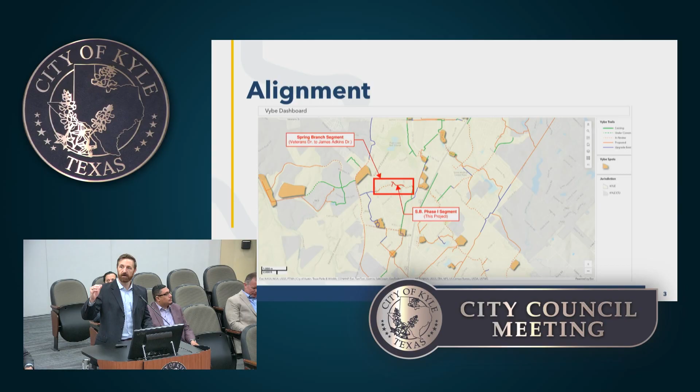So we're super honored to be part of this. Just to give you an overview, what's on the screen is a map of the overall Vybe Trail system from the Vybe dashboard on the city's website. The portion we're talking about is Phase 1 of the Spring Branch segment, which runs between James Adkins and Veterans Drive, between Western Cove and Spring Branch Drive.

It connects the Plum Creek neighborhood and the Silverado neighborhood, and then also Spring Branch Drive.

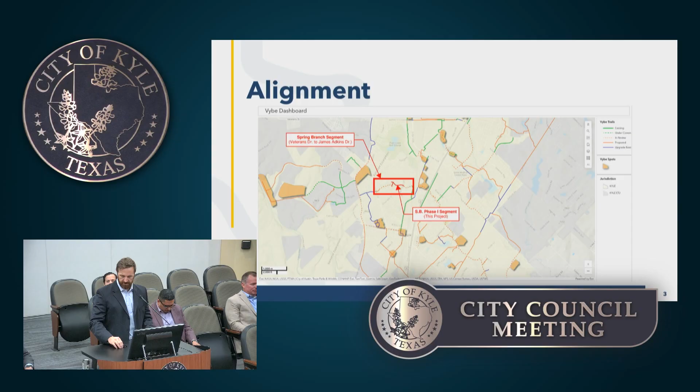Schaumburg and Polk did a preliminary engineering study of the alignment for the entire Spring Branch segment, which runs all the way from Veterans to James Adkins. You can see on this map a property ownership exhibit showing which portions of property the city owned or where easements might have been needed back when this was studied. Outlined in red is the Phase 1 segment we're talking about tonight.

And for a little bit of history, that orange triangle on the left side of the Phase 1 segment was previously owned by the Silverado HOA, I believe, and the city purchased that last spring. With that purchase, the full design and construction of the Spring Branch Phase 1 segment is able to continue.

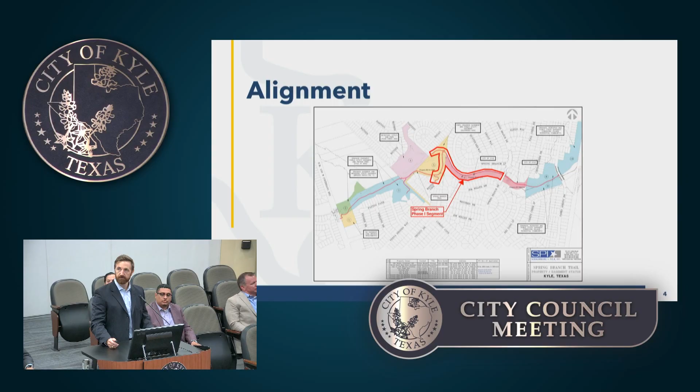As part of that, the city had discussions with the city's floodplain administrator about the need for a floodplain development permit or floodplain analysis. What's on the screen right now is the Spring Branch Phase 1 segment superimposed on top of what is currently the city's floodplain mapping for this area.

That's a study done in 2014 through the U.S. Army Corps of Engineers, USACE. As you can see, part of the trail goes through the floodplain, goes across it, and some of it travels within and adjacent to the floodplain.

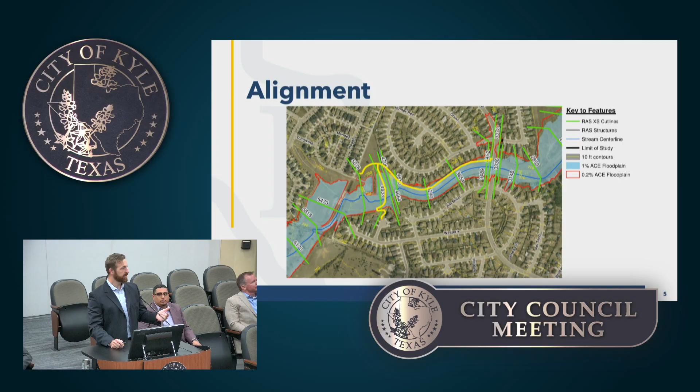The feedback we got from the city's floodplain administrator was that a floodplain development permit would be required for this trail to go all the way to construction. So that's what we're here talking about tonight, progress on the flood study necessary to complete the floodplain development application.

Schaumburg and Polk has completed the initial flood study of this area of Spring Branch. Part of that includes updating the hydrology to Atlas 14 standards, which are relatively recent. Those were not the standards used back in 2014 when the last floodplain model was developed. So part of our charge in studying the floodplain is to update to current standards, Atlas 14, and then analyze the impacts of the trail.

So we've done that floodplain modeling, and that modeling is complete. What's presented on the slide here is what we were planning to submit to you guys this past Monday. In analyzing the impacts of the trail to that floodplain, although they are super minimal, we still believe we need to make some minor adjustments to those construction plans to improve the condition after the trail is installed.

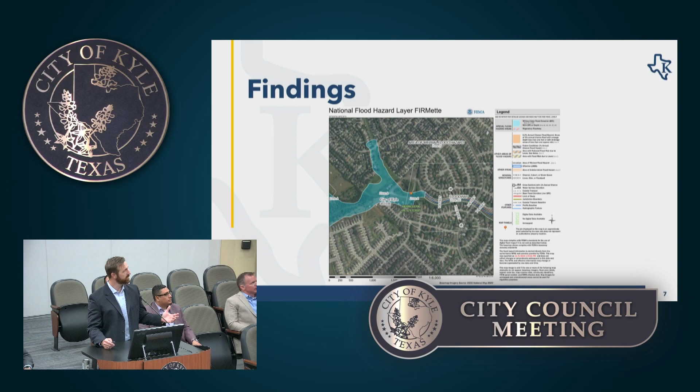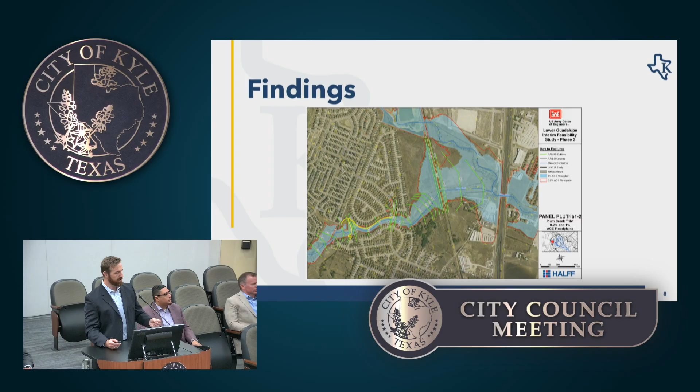These are the preliminary results from our floodplain model that we've done. If I flip back and forth, not to make you sick, you can see there's a bit of detail that exists in this FEMA map. These FEMA maps are generally based on historical records and reports, not on specific models. Some of that detail was lost in the 2014 study, and with the updates to the Atlas 14 data, some of those historical reports are again reflected back in this floodplain model.

So this is a floodplain model up to current standards, and you probably can't even see any difference on this map. There's a yellow outline, which is the existing floodplain, and an orange outline, which is the floodplain with the proposed trail improvements. They're almost right on top of each other. We're showing a decrease in floodplain elevation in some areas, and in general no increase in the floodplain. There are some minor areas we'd like to make better before we send this to construction.

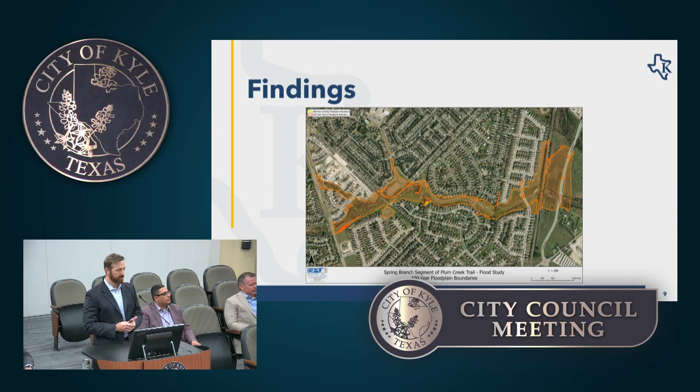So like I mentioned, we've done the initial flood study with almost no increase in the floodplain, and we're currently in the process of making some modifications to the plans so that we can really minimize any impact to the floodplain that the proposed trail would have. Then we're planning to submit that to the city with updated construction plans.

We should be able to follow this schedule. We're slightly delayed from what we had in the slide earlier, but I think this is still a good schedule. We should be submitting sometime this month for a floodplain development permit application, along with updated 90% construction drawings, which account for the revised limits of the project to just the Phase 1 scope.

Hopefully sometime next month we anticipate getting floodplain development comments and city comments on the construction drawings. We would then resubmit plans in January of '26 and hopefully have very minimal comments issued, if any, from the floodplain administrator or from any of the city departments who would review it, and hopefully be able to go out for bid maybe in February of next year.

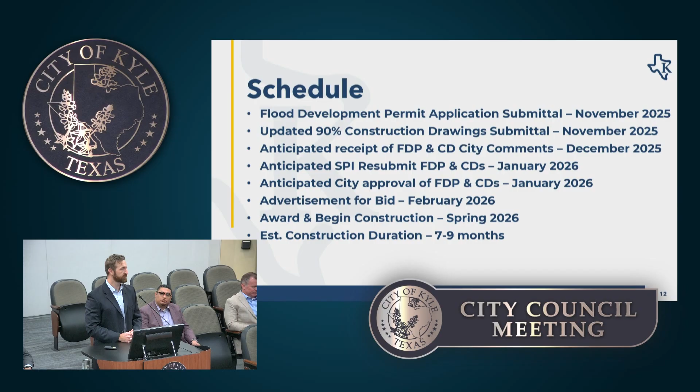Okay, do we have any questions? Dr. Harris?

The houses along Jim Miller that are right up against the berm almost, their lots are consistently flooding every time. This is an ephemeral stream—it doesn't have water in it all the time, but when it rains, it really, really floods that area. Our trail is going on top of that berm, right? Not on the Jim Miller side, on the opposite side of the creek, yes.

On the north side. But we may have, I'm sure that we did—we make a point to analyze multiple options every time we do a project like this. Putting the trail on the south side of the creek may have been one of the options we analyzed before recommending, because we met with the residents there in Silverado, and they were concerned about the flooding in their yards and that the trail would make it worse. Yes, we were talking at that point about putting the trail on top of that berm at the back of their yard.

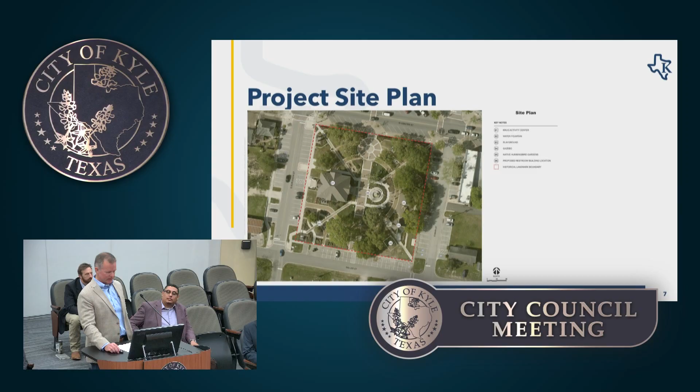So our task for the restroom building is simply to come up with ideas and designs for the restroom center that are sensitive to the historic nature of the site, right? We all know the importance of the Krug Center. The entire site is historically protected, and so our task is to design a building that is sensitive to the historic nature.

And I do want to point out that the size of this building is intended to meet the needs of the park users. It is not going to be sized to meet the demands of market days. During market days, we will still need to bring in additional restroom buildings. So this will have 2 to 3 stalls on each side, not the 10 or 12 that you could need for a larger event, right?

Also, I want to note that the intent is for this to be a prefabricated building, not a stick-built structure. The city had gone through this process a couple of years ago, and there were some issues, so that building was actually installed at another location. But being a prefabricated building comes with some challenges because there's only so much customization you can do - there's set designs and set palettes. So we're going to have to get creative and choose the right manufacturer that can do this customization. We'll talk about that more.

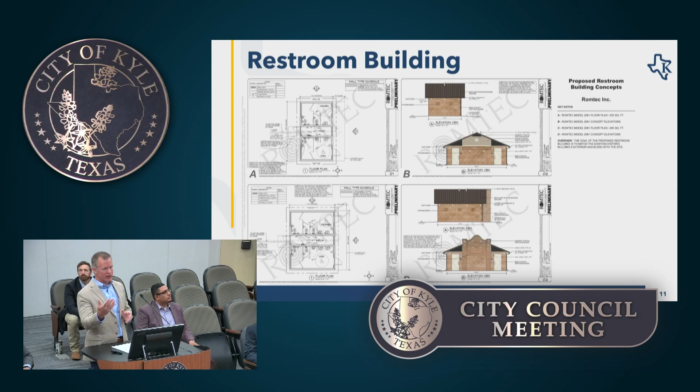So this was our first step: how can we, in the simplest way, take a prefabricated building and make it match or tie into the existing architecture? Looking at the cost of these buildings, the top two images, A and B, are the 2-stall floor plan.

With the embellishments, architectural style, that's really hard to read, isn't it? It's very small, I have to get closer.

Look at the cost. The 2-stall restroom building constructed on site totals $550,000, and the 3-stall restroom building totals $612,000.

The cost of restroom buildings is always surprising. When we present this, it's kind of hard to understand why they're so expensive, but keep in mind these buildings are open to the public, unsupervised, 12 or more hours a day. They are magnets for vandalism and abuse and have to be built to withstand that. I'm not saying they're vandal-proof or fire-proof, but they're certainly resistant to fire and vandalism. We've removed combustible materials, the plumbing is heavy-duty and installed above ground in a chase so it can be maintained easily, and the finishes are vandal resistant - if someone spray paints it, it can be somewhat easily removed. So like I said, it's not vandal proof, but these are built more like a school than a house. That's where the cost comes from.

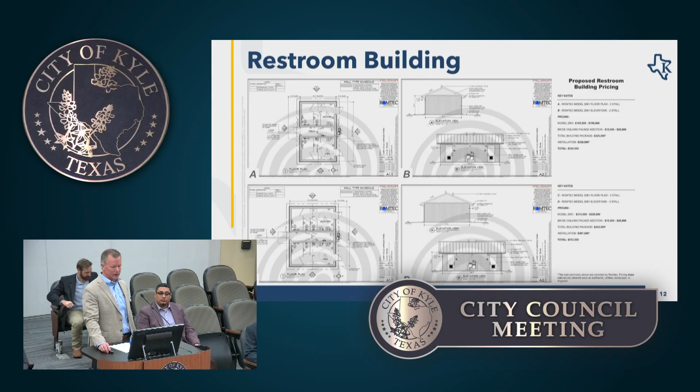But instead of just setting the building out here, we wanted to provide some seating, some landscaping, and wide sidewalks that tie in with the existing circulation patterns.

There were concerns during our public engagement process that this was adding too much concrete - too much impervious surfacing to the site. So these sidewalks could be reduced and narrowed up, and we could use pervious surfacing under the picnic tables. There are ways to reduce the pavement while keeping the same or similar layout. But in response to those comments, we did a second layout, which is much more simple, removing almost all pavement.

So we realigned the restroom so it aligned with the existing sidewalk, and we set it back just far enough to create a landing between the building and the existing sidewalk. You don't want your door opening directly up onto the sidewalk, or people coming out of the building into the flow of traffic. So there's just enough room for people to get off the main sidewalk, enter the building, or even wait to go in or wait for someone to come out.

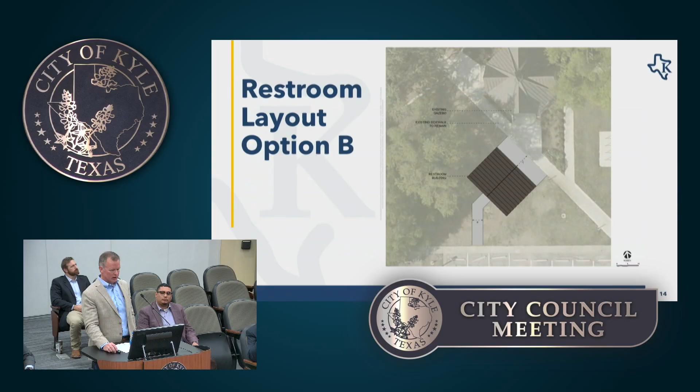Looking at total cost of this project: site work, the concrete, pavement, and the restroom building—I'll point out this is showing the cost of the 3-stall restroom building, so this is the higher end. Utilities, electric, and landscape, we're at $780,000. So it adds up very fast.

In speaking with the Texas Historical Commission, when we started the process, our first conversation with them, we believed that the previous permit was still valid. We learned that was not the case. So once we know what the floor plan is going to be, what the facade is going to be, we will be resubmitting for a new permit with THC. Since there was an original permit, I don't anticipate any issues with getting a new permit.

With the Hays County Historical Commission, they were very concerned with the amount of concrete, limiting that, and they preferred realignment of the restroom to that existing sidewalk. So that's where the second layout option came from. Also concerned with protecting existing trees, and there was mixed input on which facade they liked.

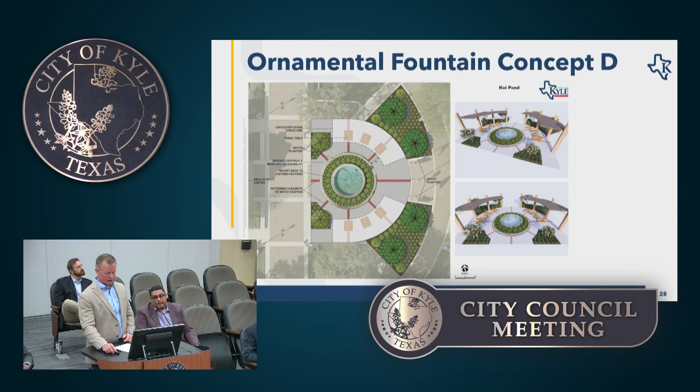The question that came up, and I briefly mentioned it, was concern about the shade structures. I think it was a good point. Our initial images did not necessarily communicate what those shade structures could be, but we've since updated it. The shade structures could certainly have the same materials we use on the new restroom building, the same brick, the same cast stone, same accents or embellishments. So I think making the shade structures blend with existing architecture is not a problem.

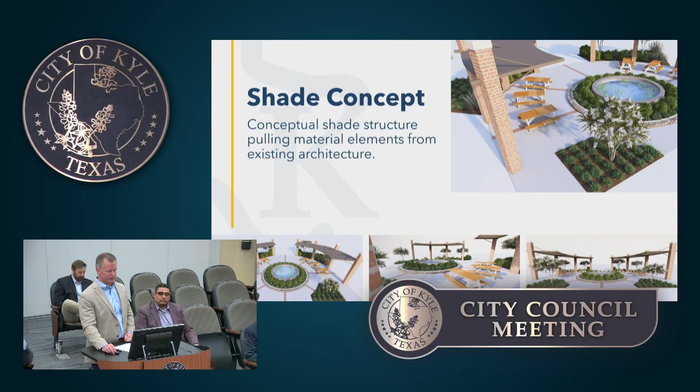But it was a good comment at the time. So the next steps are really deciding what's the best option. What do you guys prefer? Is it the fountain or is it the pond? And if it is the pond, we'll need to document it and address that with

THC. I also want to clarify that this task does not go into construction documents or construction. This task is really just a conceptual study of what this space could be. So staff could decide at a later point that they want to proceed and it becomes a construction project. But at this point, it's really just a study of what can be done.

So. Anybody have any questions referencing the fountain? Okay, Councilmember Harris.

That this area really has an interesting history. That pond or fountain was just kind of put there with nobody's approval by a person who was not skilled at what he was doing. You're talking about the three-tiered fountain? No, the whole thing. Yeah, it was very informally done. And there was some debate about it to begin with, whether or not that should just be taken down and somebody more skilled do it, but they did not do that.

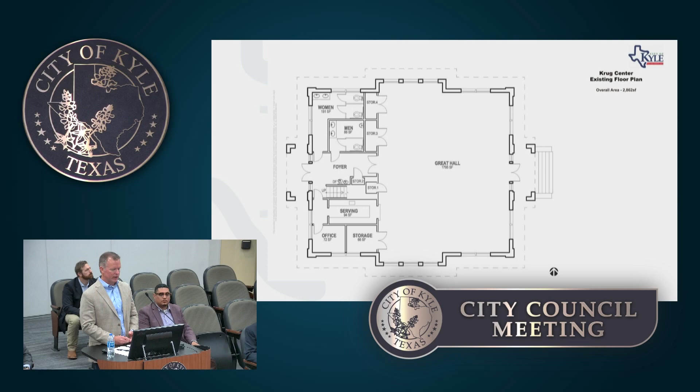And I'll admit that we got a little in front of our skis when we were discussing this. We jumped straight into looking at different floor plan options before truly understanding the full programming component. We knew the restrooms, or the men's room specifically, was not code compliant, and that was a big deal—it was brought up several times. So we jumped right in and started exploring different options for restroom layouts, and whether we could use that existing restroom footprint to make the restrooms larger. And the answer was no, we couldn't.

In doing so, we realized that in order to enlarge these restrooms, the west wall of what we're calling the Great Hall—the main large room—would have to be pushed out into that space, which is not ideal, as it reduces the size of that room, but it also starts blocking the windows.

You can see on the north and south side how that restroom is built out and it blocks those windows. So we understand that's not ideal. We looked at it with a 2-stall floor plan, but also a three stall layout, and the encroachment is obviously greater. The impact on those windows is greater.

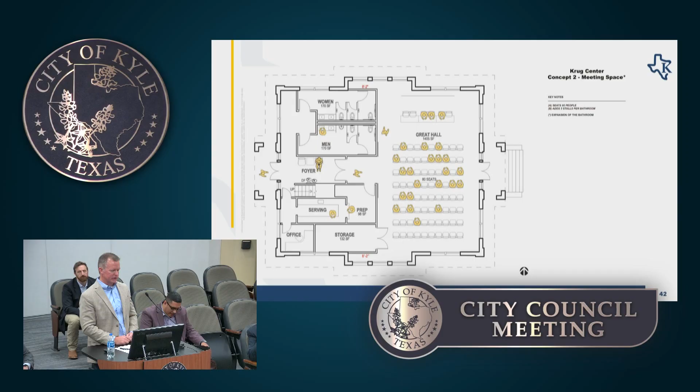They liked how we had modified the floor plan outside the kitchen so there's a serving window that now opens up into that great room. If you're going to have a banquet or reception, you're not going to be serving food directly into that space - you need a prep room or vestibule to separate your serving space from your main space. So that was well received. Our next steps are getting feedback from you, and then circling back and taking a more holistic approach with the programming and the floor plan.

So I guess my first question would be, how do you guys envision this building being used over the next couple of years? Do you have any feedback, Councilmember McKinney?

I guess I just always had envisioned in my mind that it was going to be parks programming use - it being a centerpiece in the park itself. I never even considered anything outside of that. So I might need to open up my own box for a little bit and unpack some things before I come up with anything legitimate.

Councilmember Harris: It is a great venue for performance. Put a stage in it, even if it's a fold-up stage we move out of the way, some risers. We don't have any performance area anywhere in the city, and that's a shame, because we do have artists who like to perform. When Kaz has their concerts, we did the concert this last weekend, and often they're really well attended, and sometimes they're not. But I think if we used it at least on Fridays and Saturdays for performance, that could really be a benefit to that whole area.

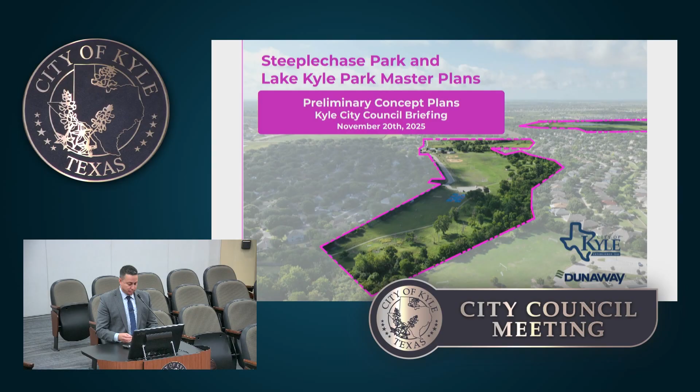So at this time, I'd like to invite Elizabeth Jarrow and Kelsey Ross of Dunaway to the podium to begin sharing the beginning of what we think will be a very impactful story on the future of your parks, that will someday result in them being amongst the best parks in the region, for a happier, healthier, and more sustainable Kyle, Texas.

Good evening, Council. My name's Elizabeth. It's been really unique to listen to your special session tonight. You zoomed out and talked about a drainage way and big vision for a floodway, then you zoomed in on a lot of detail. So you've had to go from big vision down to detail. Now we're going to zoom out just a little bit more, so hang on for the ride.

One thing I want to say tonight is thank you. We're coming up on Thanksgiving, and David and I were talking about this earlier, on my drive down here to join our Central Texas team that's really been diving into this and enjoying helping put together some concepts for y'all. We get to design parks every single day, and you guys have trusted us with over 160 acres of your park system. This is a special moment tonight where we get to hear your input on some of the initial ideas we've been able to come up with. So thanks for having us here, we're grateful that we get to do that. I'm grateful that I'm up past my bedtime and I get to talk about parks. So here we go.

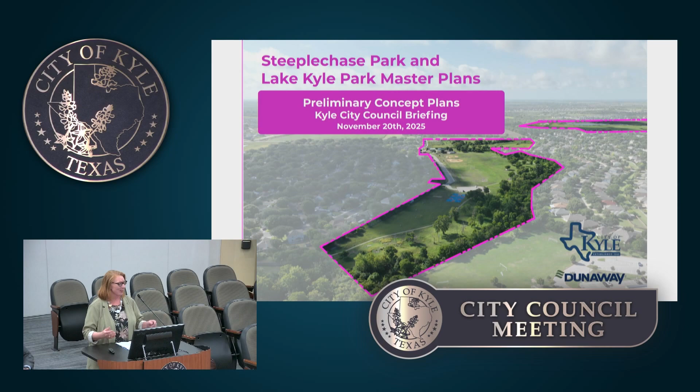What I'd like to do first is set the stage for the project and let you know where we are. I'll talk a little about the team working on it, and give you some basis for what we're going to build up to, which is the concept alternatives later, which we definitely want your input on. You guys have already been in a big planning stage, I don't have to remind you of the growth you've been going through, and it takes a lot of planning, dedication, and intentionality to be responsible with the resources, especially your parks that you're stewarding. So we did use the planning, the PROS plan especially, that you've already gone through, as a basis for what we've done.

We've looked at each site and gone through some layers of analysis, I'll go through those quickly, and then we took that and formulated some very initial ideas. As David mentioned, you can see this timeline here. We started in early summer, and of course it was blazing hot out there, but we got to spend a lot of time out with John Davis, Chris, David, Amy and Will on each site, really getting to know the nuances of how people use them. We saw people out enjoying the splash pad, and we saw Texas Parks and Wildlife out setting bait so they could photograph raptor birds that were coming in.

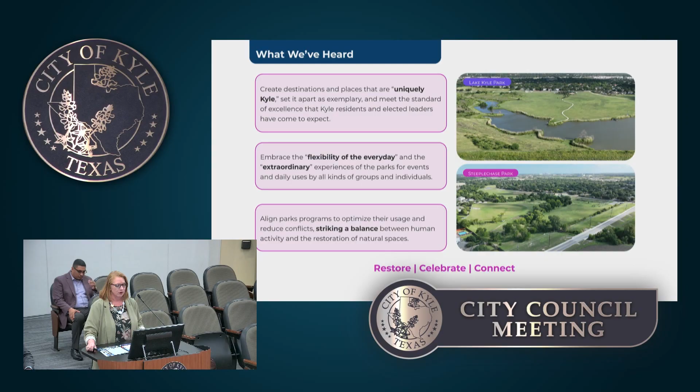And then connection—we've already talked about the Vybe Trail. That's a key connector through both of these concepts.

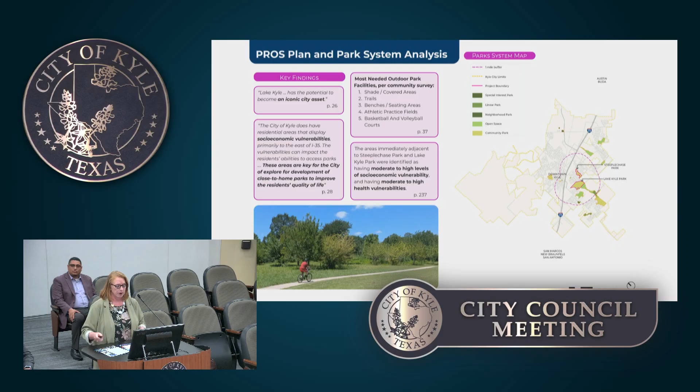Touching on the PROS plan, you've already done a system-wide analysis, and this is really serving as a basis for our plan. One thing I'll note about this slide is how strategically Steeplechase and Lake Kyle are located between Waterleaf, and Kensington is nearby—those are such great natural resources for you, especially on the east side, noting their high visibility and location amongst neighborhoods where access to green space is very important.

So a couple of pieces of analysis that you'll find in our final master plan report—these are just some samples. We think about the social watershed, which is really just a fancy way of saying who is living around the park, who is in close proximity to it, and what type of user groups we need to think about when considering program items and the spatial arrangement of those.

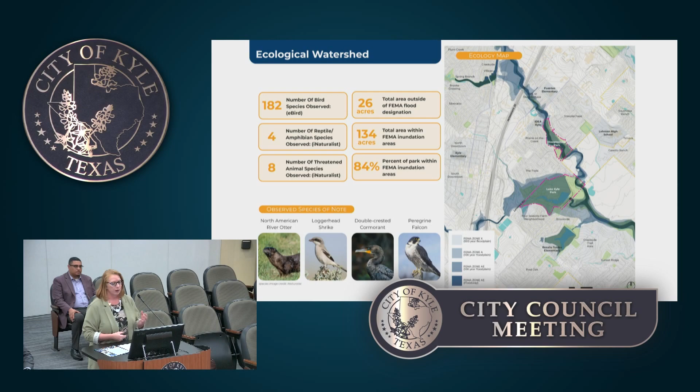That's also around water where people want to be. You just talked for 45 minutes about a small pool, a fountain, and the attraction that water is. Think about the draw of Plum Creek and Lake Kyle Park and the waterways that go through these natural resources.

The next thing our team did is take a general inventory of what's there. So that's the first place we start, at Steeplechase. Probably the biggest thing it's known for is the dog park, the splash pad, and the athletic facilities. I know it's a big destination for disc golf, so we want to make sure we're considering all these different activities that in some ways can compete with each other, but if we arrange it right, they can really complement each other.

It's interesting, it's about a 40-acre park, and you'll hear us in the presentation refer to it as a neighborhood park, and that's a large neighborhood park. Typically neighborhood parks are much smaller. This one, in my opinion, functions a little bit more like a community park. So you've got a greater mix of activities that can serve both the neighbors, but then also a broader reach in your community.

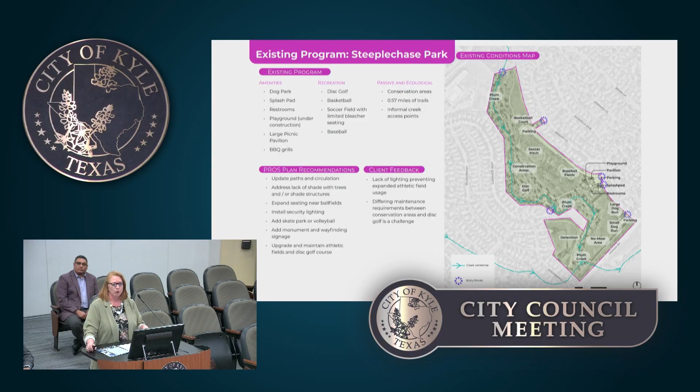All right, this looks like a complicated slide to look at, but what this helps us do—now we're back at Steeplechase—is understand where we have overlapping existing uses in parts of the park. Where you see the patterns get really complicated, those are areas that are question marks to us, where we want to make sure we have the right balance of activities.

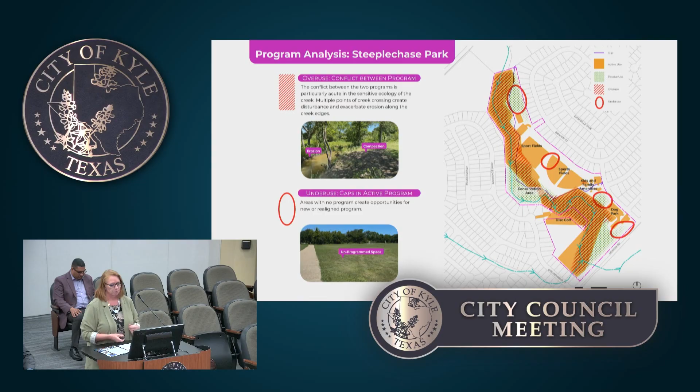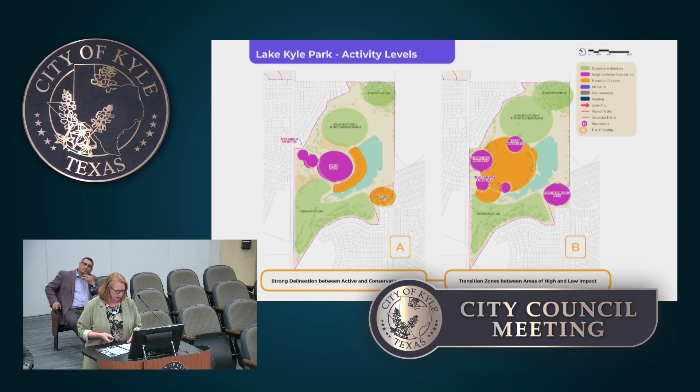Thinking about access throughout the park, the difference between A and B is that in A, the Vybe Trail comes in from the north, loops around the event space, and exits to the south along the roadway. In B, there's the same access, but also a loop all the way around the lake, plus a signature bridge that takes you from the gateway across the event lawn and across the lake.

That's an even more unique opportunity for us to have access to the water, a potential iconic architectural piece. These become photo ops, places that people visit—it becomes a free overlook. So this bridge across to the other side really begins to open up the park.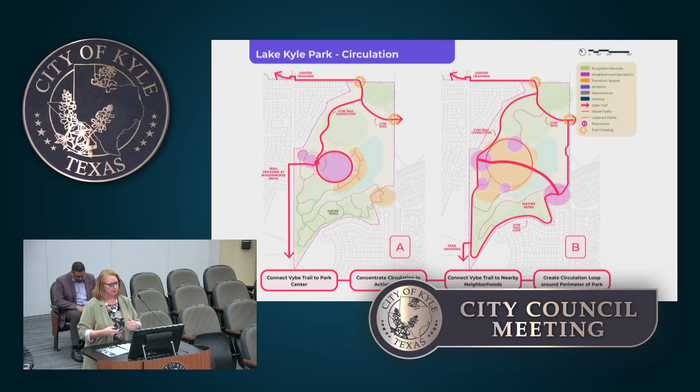Will the Plum Creek Conservation District allow us to put a bridge across the lake? That's a great question, and we asked ourselves that immediately. We've already been in contact with them, and they don't have a problem with the bridge. They've approved that up to this point.

This shows where the pink bubbles, or the amenities, your destinations around the park, would be located. In A, they're more consolidated where you'd expect amenities to be today. But there is an upgrade to all these—new architectural finishes, new trail connections, a small stage.

One thing I didn't mention in A, there is an event band shell along the right side of that large event lawn, backing the water, so the water serves as a backdrop behind that band shell. So from the road, you have a clear visual invitation in to the band shell, with the water as a backdrop.

So there's some symmetry there, and then you've got the conservation pieces around that, but it really clusters your most high-volume activity toward the center in that concept.

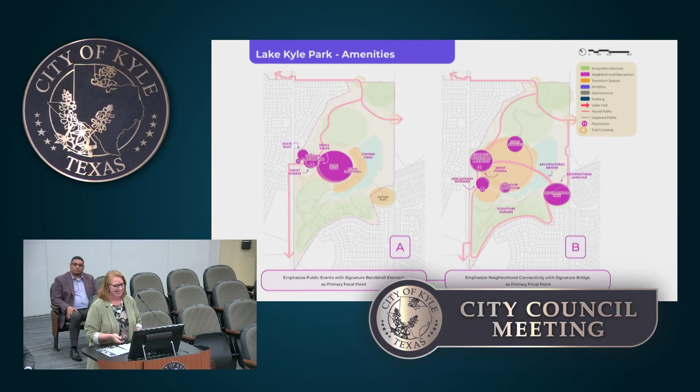That really could be a magical place in either concept. In concept A, it's more of a neighborhood park, light touch, maybe with some nature playground equipment. But in B, we really take advantage of that bridge to get folks across, with an architectural piece up on the high point. It could be a very special place, and it was a surprise to our team as we spent so much time on the site.

We're always thinking about access and parking. I know there are some new parking improvements starting in January—is that correct? Yes. This is really us just documenting the existing parking that's going to be there, over 200 spaces, if I'm not mistaken—Steeplechase is the 200 spaces. Sorry about that.

But I know there's a rideshare program for Lake Kyle for the big events, and the idea on both of these is to make sure we have enough parking for day-to-day use, and we think about parking solutions for when you have really big events.

If I could add real quick, have we looked at expanding the parking at Lake Kyle? I know we have it right at the Cross Fitness section, the court—were we still looking at expanding a little bit further out? Yes, sir, that is part of these conceptual plans, finding the right sizing and spacing needs for the programming.

First, we need to really decide on the type of programming. Right now we know it's used for Kyle Fair, but you're hearing about a lot of wonderful upgrades to really enhance this park, and we absolutely make sure that parking accommodations are there. Okay, that's good.

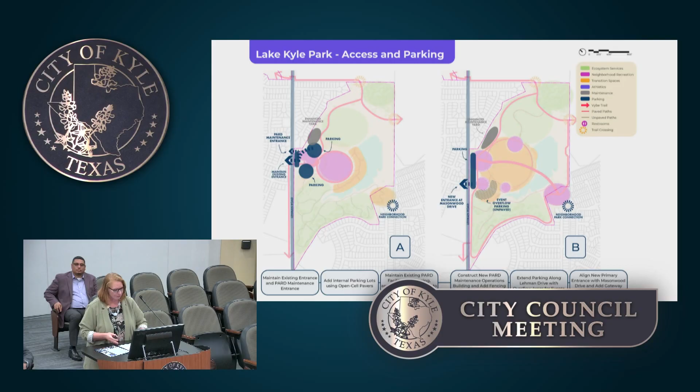So here's some big ideas for some of the iconic architecture that could happen. That can even happen in your playground. I know you have, is it at Waterleaf? You have some pretty unique play equipment and concepts for that.

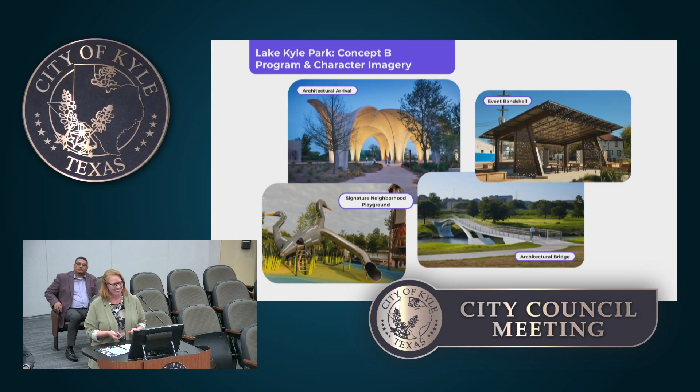So in comparing and contrasting A and B, really what A is about is having... yeah, this one pulls it together. In A, you have your event space, you have your Vybe Trail connection, you have a rearranging of some of the amenities that are at your entry today. You have this iconic band shell that can have Lake Kyle as the backdrop, and you have expanded touch points to the water as well as into the conservation areas.

So it's very much taking what you have today and building on it. When you look at concept B, there's a lot more going on, a lot more colors. The same pieces are there, but the connections through the bridge get you to special places in the park, like up on the high point, having not just one band shell, but a couple of different stage points. It gives you the flexibility to take that large green open space and program it for large events, small events, and everything in between.

So I'll pause there because I do want to talk about steeplechase next, but the most important thing to us right now is, do we have the program elements right? And as we're starting to think about them spatially, are we moving in the right direction with either of these? Oftentimes it ends up being a blend of the two concepts. So we'd love y'all's feedback on which of the concepts, or what you like about each one.

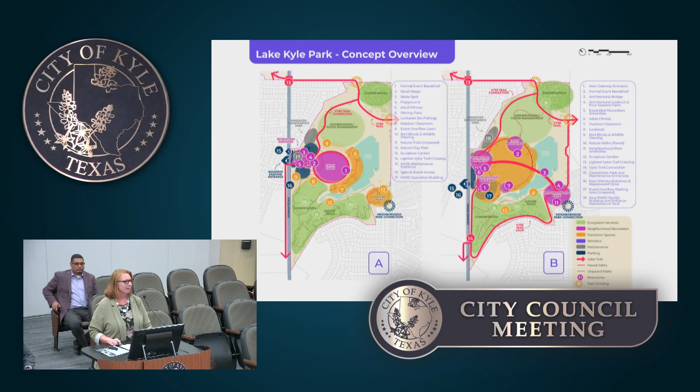So I like that in option B, the Vybe Trail circulates throughout the park, so it can guide people to other parts of the park and kind of force them out to go experience other areas.

I really appreciate that. I think the other thing is, because we host a really significant signature event, is there a way we can maintain somewhat even half the size of the event lawn in A and the event band shell, and have that incorporated into B? Even if it's just half the size, something a little bit larger. That's feedback I've gotten from residents, that the area is a little small and cramped, and I think having something more formal also differentiates it from La Verde, because right now that's a smaller event band shell.

So if we're going to be doing something, I would like to have multiple purpose, different venue locations that are different from one another instead of exactly the same.

Yeah, absolutely. I think the vision you're describing is exactly what we're showing in A, this right-sized event lawn for what Kyle Fair is today, what Kyle Fair could be in the future, and for other festivals of different sizes you might be doing now or want to plan in the future once you have these upgrades in place.

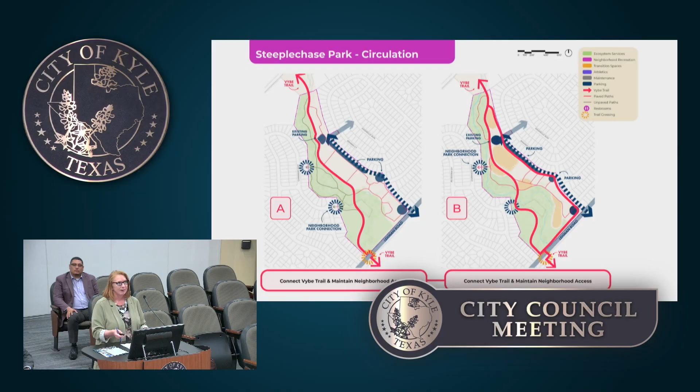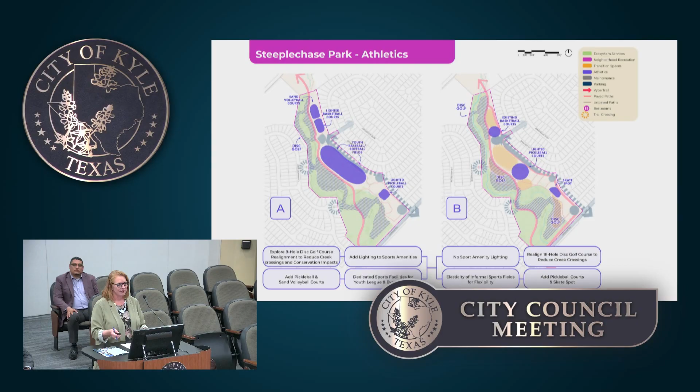This shows where we would have parking and access. Does anybody have any other questions referencing these? Was there any more feedback that you needed for this? No, I think we have what we need.

Okay, between the park board comments and the comments you guys have given us tonight, I think we know the direction we need to go in blending these concepts. Our next time to put our ears on and listen is when we engage the public and get their reaction. So I think that's going to be very informative before we go into refining the design further.

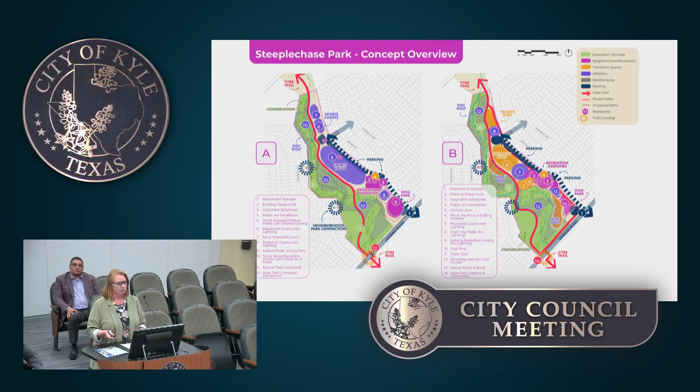David, do you know when we're going to have that? Is it going to be more of an open house that also includes the Parks Board? Elizabeth knows the scope of this like the back of her hand, but we'll probably have some combination of both, like we've done for other larger projects, where we have an open house gathering and also do a survey. So if you have any feedback on what you'd like to see in the survey process, we'd be happy to take those thoughts as well.

I'd like to see Steeplechase. I want to see it at Steeplechase. It's really important to get the residents there involved. We have at least three major neighborhoods there: Prairie Creek, Four Seasons, Steeplechase, and South Lake Ranch.

Yeah, Chris Escoto, Deputy Director. We've had multiple communications with the Steeplechase community. We're actually trying to partner with them to host a kind of charrette and introduce this right under the pavilion, so that's something we're actively in communication about.

And this week we've been communicating with several members. That's right, you did speak to Ms. Griffith. She told me you're having some board meeting, and because Steeplechase doesn't have an HOA, they're starting to band together now and give that feedback.

And Dr. Harris, Councilmember Harris, really hit it on the head on that one. We need to be able to get the community more involved, having it on site, kind of an on-site deal, versus coming to city hall.